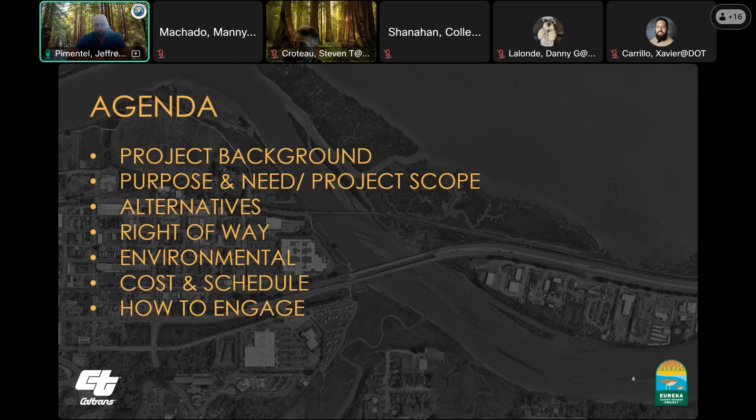We'll review the cost and schedule of the alternatives, and then we'll also let everyone know how to engage and leave a comment during this public comment period as part of the draft environmental document.

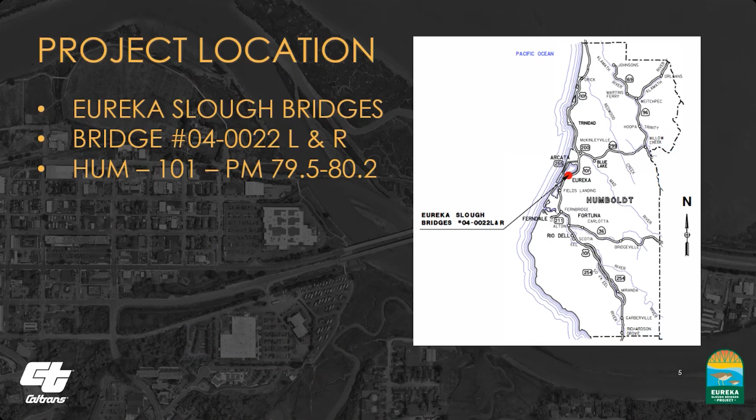Project location. As most of you are probably aware, but we'll cover it anyway, we are discussing the Eureka Slough Bridges. They are two independent structures. The Caltrans bridge numbers are 04-0022L and 04-0022R, signifying the left bridge and the right bridge. We're in Humboldt County on Route 101, and the post-mile limits of the project are 79.5 to 80.2.

A little project background for everyone here. The southbound Eureka Slough Bridge was formerly programmed and identified as a seismic retrofit project. Shortly thereafter, it was identified that the northbound structure was also in need of a seismic retrofit.

Prior to that, though, a value analysis had been performed looking at what is the best alternative to move forward with, considering the needs of the structures as well as the long-term lifespan of these structures, considering they are essentially at their expected lifespan. The results of that value analysis recommended replacement of both structures for multiple reasons.

Some of the more significant reasons were to minimize our environmental impacts. Our studies showed that doing a seismic retrofit in the immediate future was only going to allow us to remain with these structures for a short amount of time until we'd have to come back in and replace them, resulting in significant environmental impacts in both of those instances.

The cost to do two projects independently, a seismic retrofit followed by replacing the structures shortly thereafter, was going to be significantly more costly than a single project, as well as more impactful to the traveling public, given this is a large project requiring multiple seasons of construction. So in 2023, the project was officially rescoped and reprogrammed as a new project to replace both structures. And that's what we have here today: our discussion, our draft project report, and our draft environmental document.

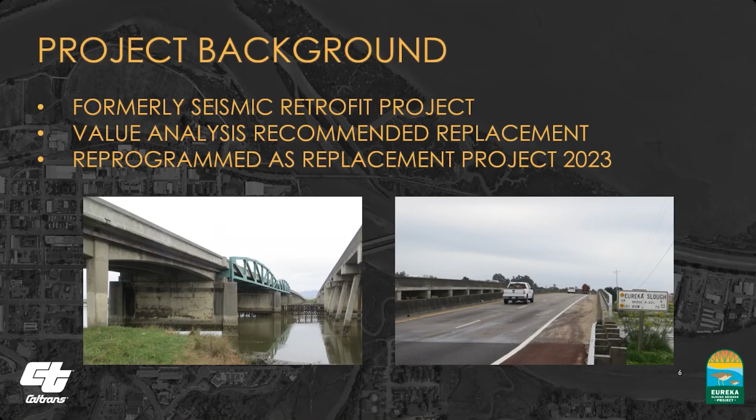Now we'll cover the project purpose and need. Every project within the department has a very specific purpose and need. The purpose and need is essentially the sideboards that dictate the improvements and work that will be performed for the project in terms of the project scope.

The purpose of this project is to improve the function and geometrics of the northbound and southbound Eureka Slough Bridges, to ensure uninterrupted traffic movement in the event of a collision, emergency incident, seismic event, or any other catastrophic event, and to provide improved access for pedestrians and cyclists across the bridges.

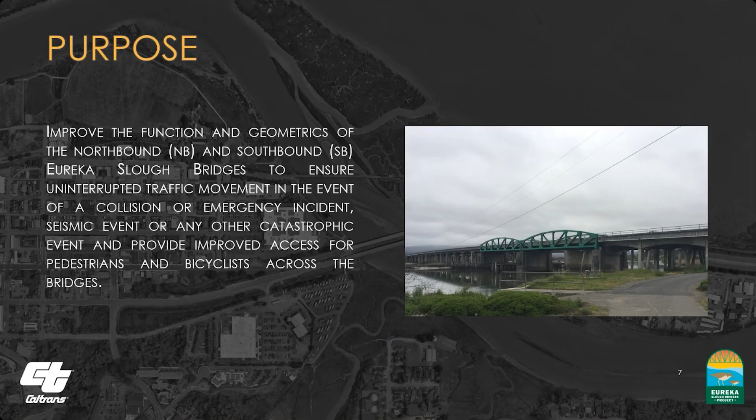The project need is to address structural and geometric deficiencies in the northbound and southbound structures. The southbound structure has seismic deficiencies, is fracture critical, and has a non-standard profile, which contributes to a collision rate at the bridge departure that is double the statewide average compared to similar facilities. The northbound structure has seismic deficiencies with non-standard bridge rails and is built on raised concrete curbs within the shoulders. Both structures are approaching their design life and have narrow shoulders that impede multimodal transportation.

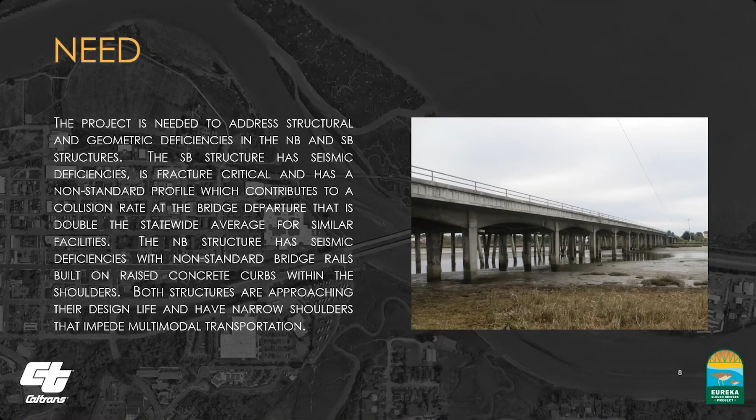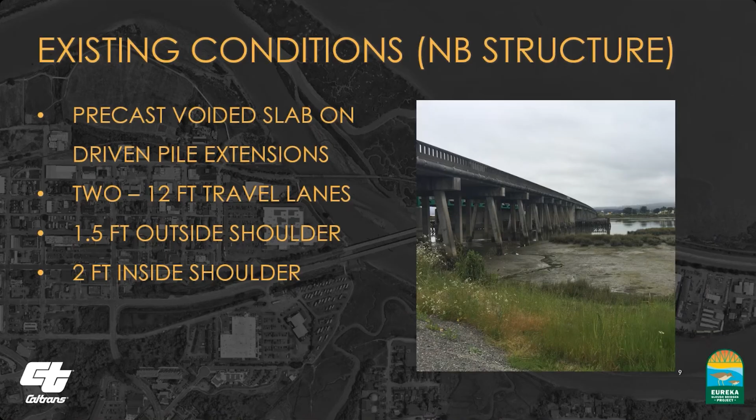Now to go through some of the existing conditions for both the northbound and southbound structures. Looking at the northbound structure, pictured to the right of this slide, it is essentially a precast voided slab on driven pile extensions. That is the type of structure we're looking at today. There exist two 12-foot travel lanes, a 1.5-foot outside shoulder, and a 2-foot inside shoulder.

The southbound structure is composed of a steel pony truss as well as concrete T-girders on driven timber piles. We also have two 12-foot travel lanes, a 6-foot outside shoulder, and a 1.5-foot inside shoulder.

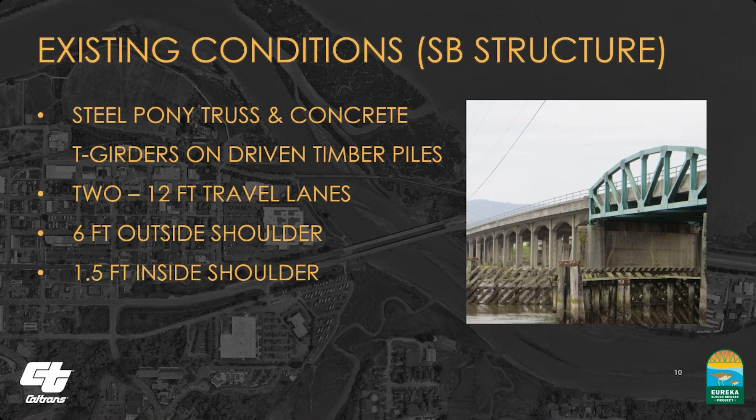In terms of the project scope, we propose to replace both the northbound and southbound structures. They're approximately 900 feet in length. The proposal under both project alternatives would be to replace them as independent structures. The structure type would be a precast wide flange I-girder on driven piles.

We would have two 12-foot travel lanes in each direction on each structure. Each structure would also have 10-foot outside shoulders and a 5-foot inside shoulder, plus a 12-foot separated pedestrian and bike path. There would be connections to the Bay Trail as well as the waterfront trail.

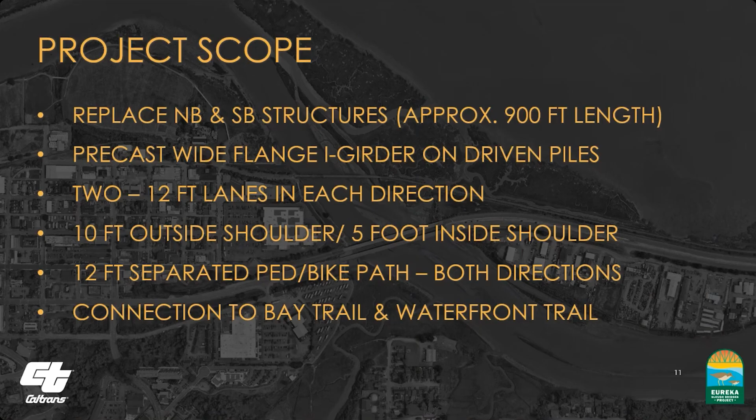Now to present the alternatives being considered for the project: we have two alternatives labeled Alternative 2A and 2B. Here you see a typical section of each. Essentially, the roadway cross-section, the lane widths, and the features provided to both motorized and non-motorized users are essentially the same—it's just the structure location that differs between Alternative 2A and 2B.

With Alternative 2A, shown at the top of this typical section sheet, the northbound and southbound structures are being replaced on virtually the same alignment as the existing structures today. This does require the use of a temporary detour bridge to facilitate replacing them on their existing alignments. We then looked at Alternative 2B, which avoids the need for a temporary detour bridge, but in order to do that, the southbound bridge required a slight realignment from its existing location.

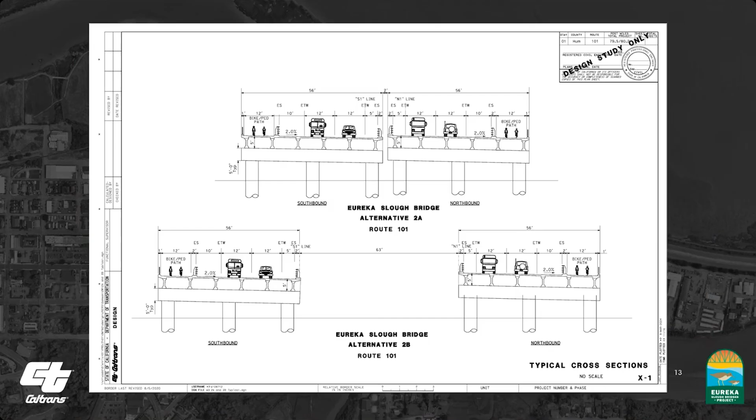In the typical section, there is a width of 63 feet between the inside edges of each structure, representing the distance between the widest or furthest points between the two structures. We will now look at a layout so you can see how the alignment would appear in a realigned fashion.

With alternative 2B, you'll notice the southbound structure has a slight realignment from its existing location in order to not need a temporary detour structure.

I will also go through a construction staging scenario sequence right after this, and you'll be able to see how the temporary bridge will fit into alternative 2A, and how the construction sequence will also look for alternative 2B. It will also show the various temporary work trestles we'll be utilizing to facilitate construction of these bridges. Again, with alternative 2B, in each quadrant of the structure we have connections to the Bay Trail and Jacobs Avenue, as well as to the Eureka waterfront trail.

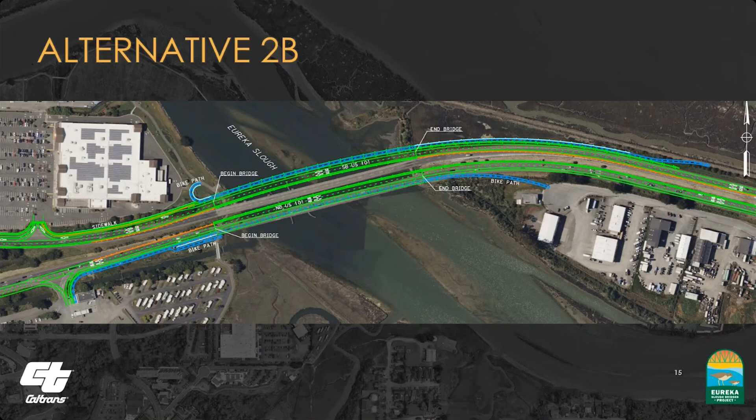So now I'll present the construction staging scenarios for each alternative.

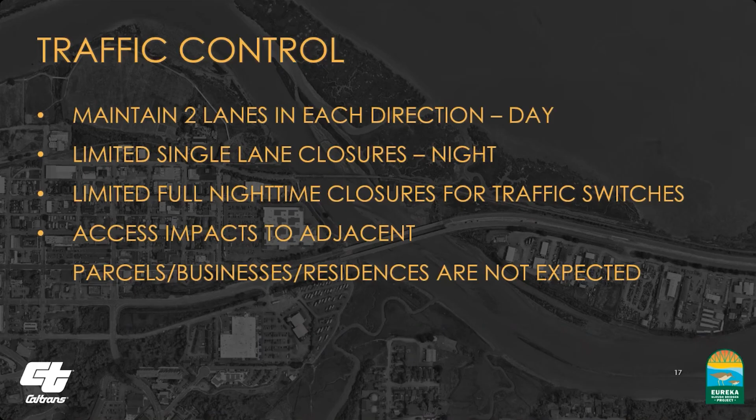In terms of traffic control, prior to getting into the step-by-steps, we do plan to maintain 2 lanes of travel in each direction during the day. But at night, we are planning to have limited single-lane closures to facilitate construction. We also plan to have limited full closures of the highway at night for traffic switches, and we expect those to be limited. We are not expecting access impacts to adjacent parcel businesses or residences as part of the construction.

Now, construction staging for alternative 2A. In stage 1, we would construct a west temporary trestle. A temporary trestle is essentially a work surface to perform the construction activities from, where all the equipment would be staged, and we facilitate construction from that platform.

In stage 2, we would then construct a temporary southbound bridge, shown there in green.

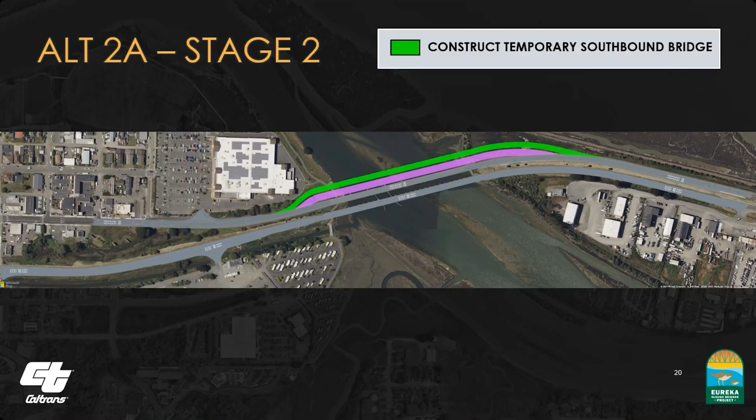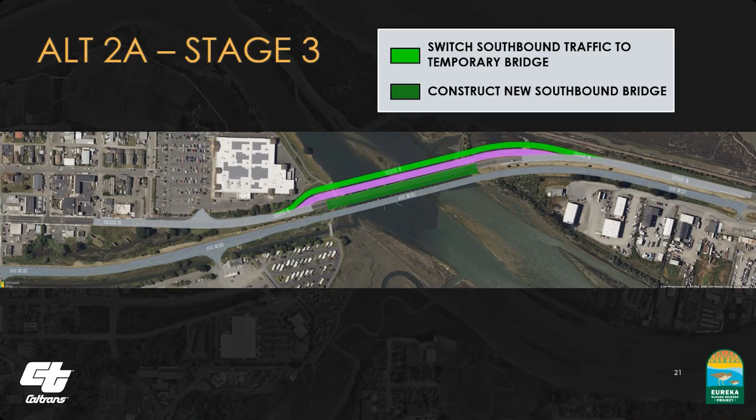In stage 3, we would switch the existing southbound traffic to the temporary detour bridge in light green, and we would then demolish the existing southbound bridge and construct a new southbound bridge, shown there in dark green.

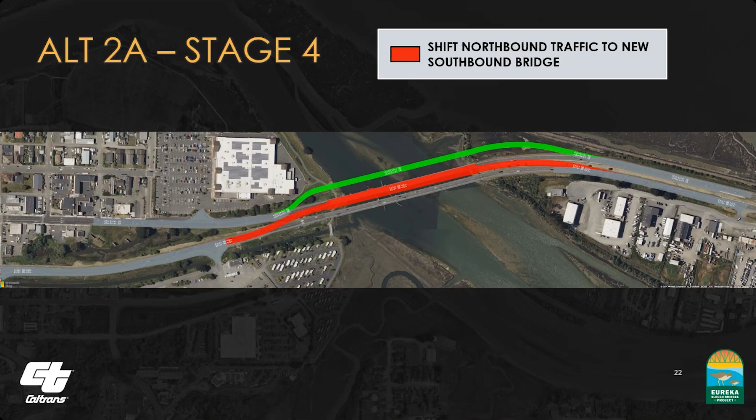In stage 4, we would shift existing northbound traffic to the new southbound bridge constructed in stage 3, shown there in red. At this point, we would have southbound traffic traveling on the green line, and northbound traffic traveling along the red line.

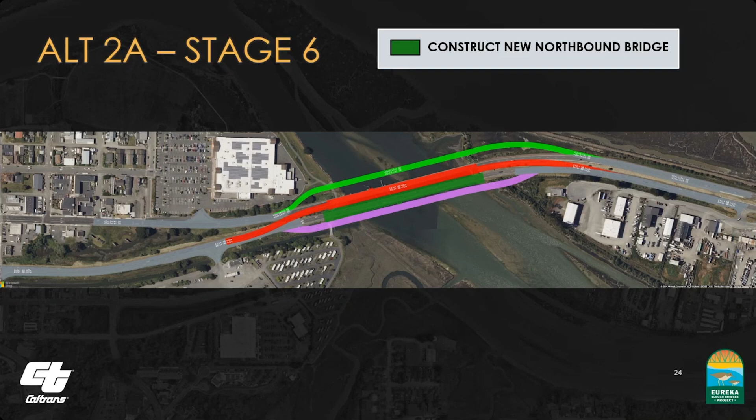Finally, in stage 7, with both the southbound and northbound structures having been replaced, we would shift the northbound and southbound traffic to their appropriate bridges in both directions.

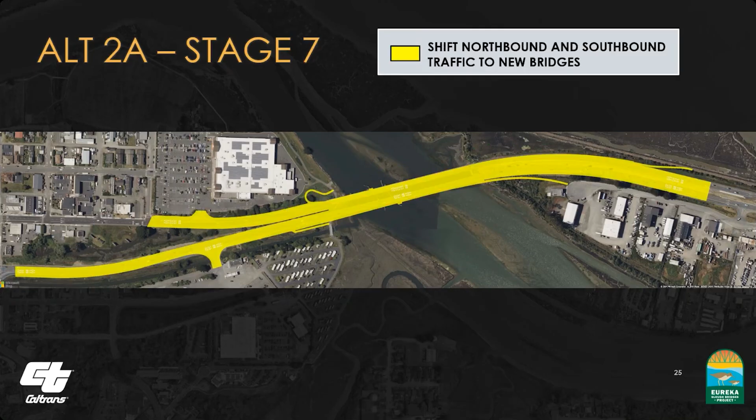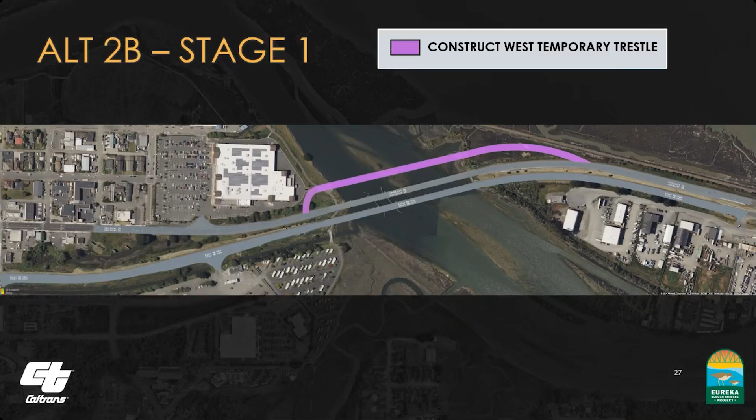Now with alternative 2B, again this involves the realignment of the southbound structure in order to not need a temporary detour bridge. With this alternative, in stage 1 we would construct a west temporary trestle, shown there in purple.

Then in stage 3, we would switch southbound traffic to the new southbound bridge previously constructed, and switch northbound traffic to the existing southbound bridge, very similar to what we did in alternative 2A. So in this condition, you'd have southbound traffic on the green and northbound traffic on the red alignment.

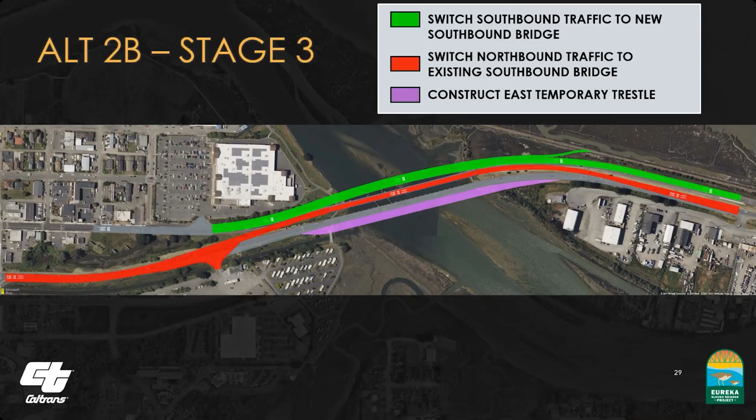Along with that, in stage 3, we would construct an east temporary trestle to facilitate construction of the northbound bridge.

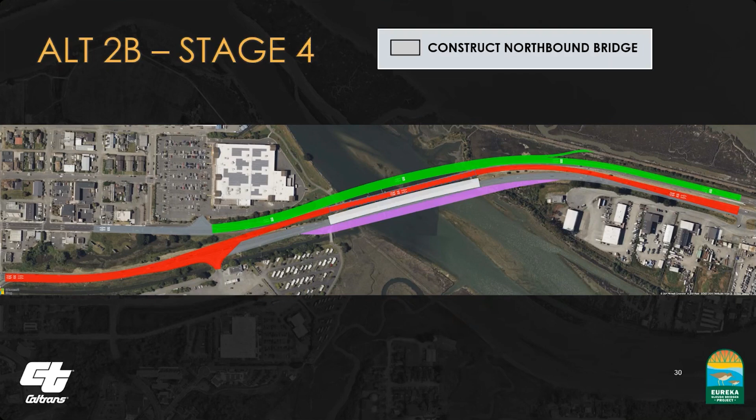In stage 4, we would demolish the existing northbound bridge and construct a new northbound bridge, shown in an ivory white color.

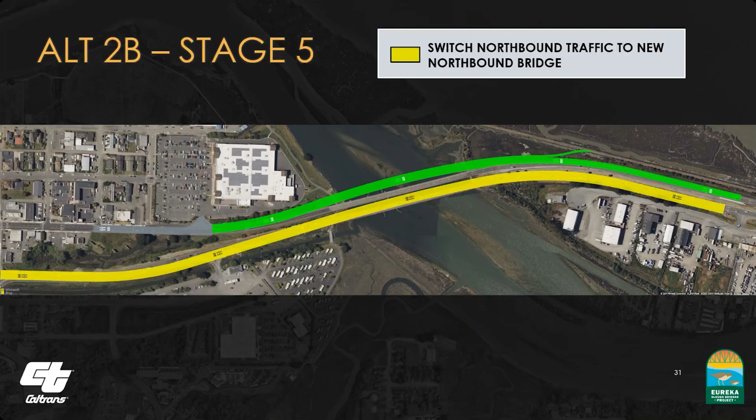In stage 5, we would switch northbound traffic to the new northbound bridge. Then in our final stage, stage 6, we would demolish and remove the existing southbound bridge that would remain between the two structures.

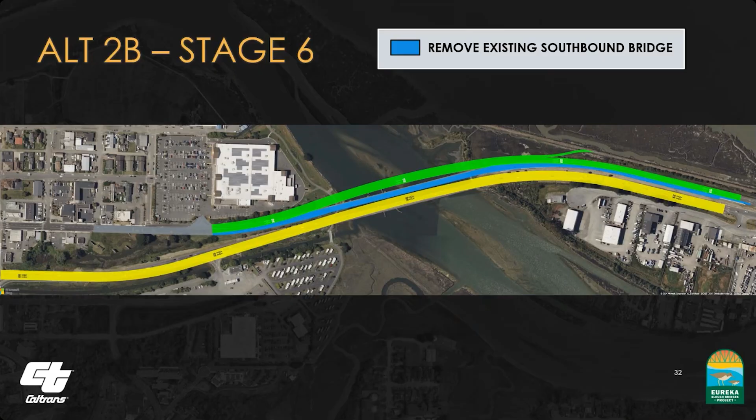Now on to right-of-way and utilities. The project is expecting to need temporary construction easements, but we are not expecting to impact business access or operations as part of those easements. Permanent right-of-way acquisition is also expected to be required, and again, we are not expecting it to impact business access or operations.

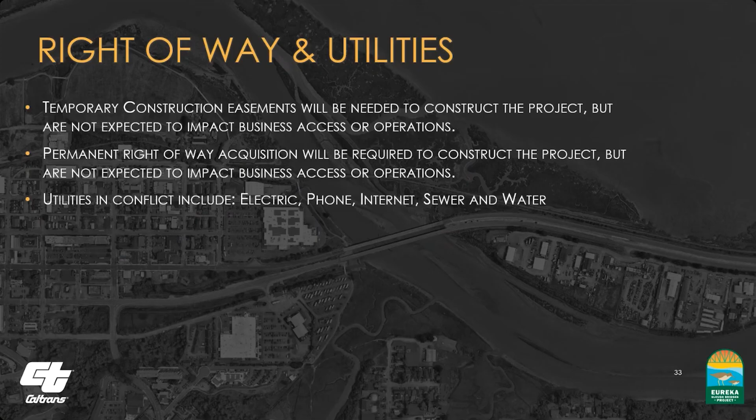We will have some utilities in conflict with the project. Those include electric, phone, internet, sewer, and water.

Now on to environmental topics related to the project. The level environmental document for this project is an Environmental Impact Report under the California Environmental Quality Act, CEQA, and an Environmental Assessment under the National Environmental Policy Act, NEPA.

The draft environmental document public circulation began on June 25th of this year, just last month.

Now on to impacts and mitigation for the project. Everything with regards to impacts and mitigation occurs with a very specific hierarchy. As a priority, we always try to avoid impacts as much as we can. Where we cannot avoid impacts, we employ minimization measures. But often with projects of this magnitude, while we try to avoid and minimize impacts, we still do have resulting impacts as part of the project.

We expect to have impacts to estuarine marsh, wetlands and waters, as well as fish species, and we expect those impacts to be both temporary and permanent. We also expect to have both on and off-site mitigation and preservation as part of our plan, with mitigation ratios expected to range from 1:1 to 4:1.

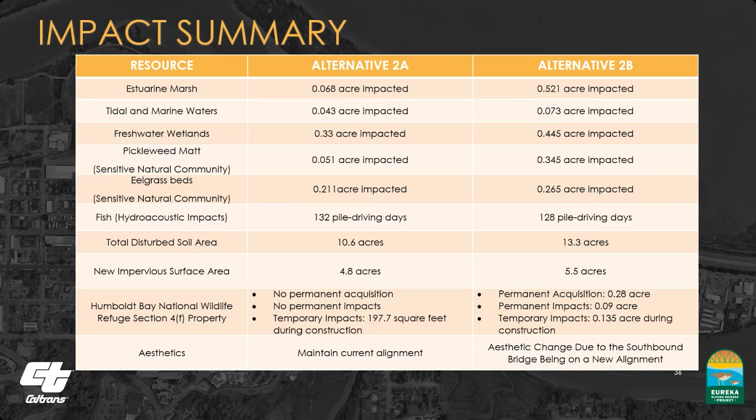Moving on, in terms of capital costs between the two alternatives - capital cost is the cost to construct the project, acquire right-of-way, and perform mitigation. These costs do not include the cost to develop the project in terms of effort, staff time, and resources for the environmental document or design. This is simply to construct, acquire right of way, and perform mitigation.

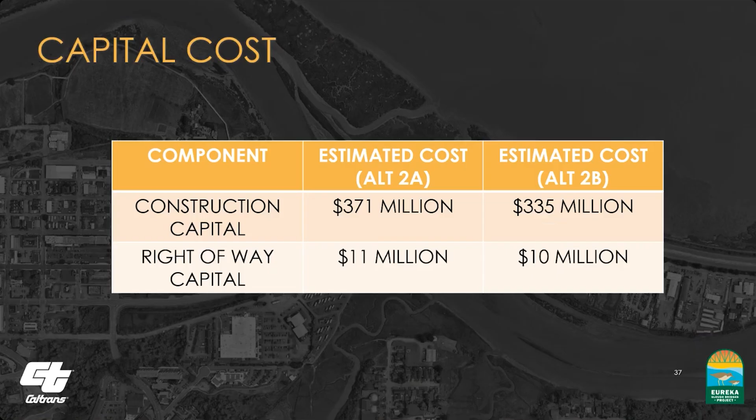For alternative 2A, the construction capital cost is $371 million, and the right-of-way capital is approximately $11 million. The estimated cost for alternative 2B for construction capital is $335 million, and right-of-way capital at $10 million. As the project continues to develop and we refine our design, we expect these numbers to refine to a degree, but based on the information we have today, this is our best estimate.

In terms of schedule, our draft environmental document was completed and began public circulation just last month, June of 2025. Our target to reach project approval and a completed environmental document, which would also include a selected preferred alternative, is July of 2026.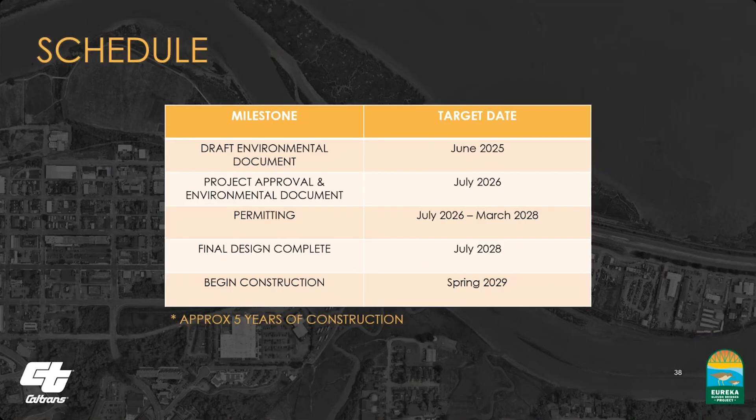Our permitting phase would span from July of 2026 to March of 2028. We are then targeting to have our final design complete in July of 2028 and begin construction in the spring of 2029, with construction estimated to be approximately 5 years.

As I mentioned before, the DED public comment period began on June 25th, 2025. That comment period runs through August 9th of 2025. We do welcome your comments.

You can submit your comments via mail to California Department of Transportation, North Region Environmental, E5 Branch, attention Steve Courteau, 1656 Union Street, Eureka, California, 95501. You can also submit comments via email to the dedicated project email, Eureka Slough Bridges at dot.ca.gov. All the materials you need to review, including the 4(f) evaluation, the draft environmental document, and draft project report, can be found at the project website, tinyurl.com/EurekaSlough.